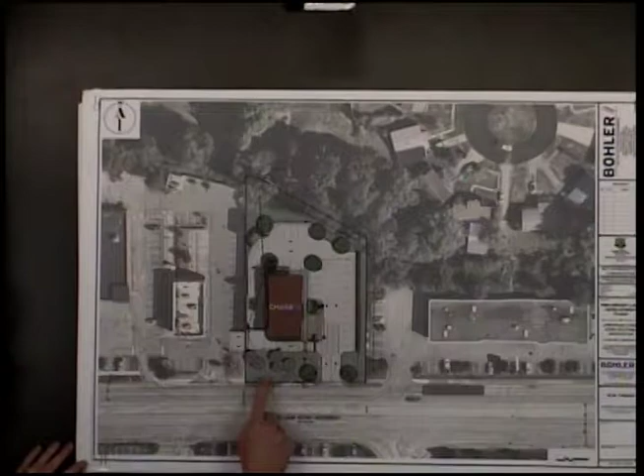As you can see on our site plan, there's an existing driveway here, and another existing driveway on the western side of the property. Chase is proposing to close that off and have only one entrance onto their site.

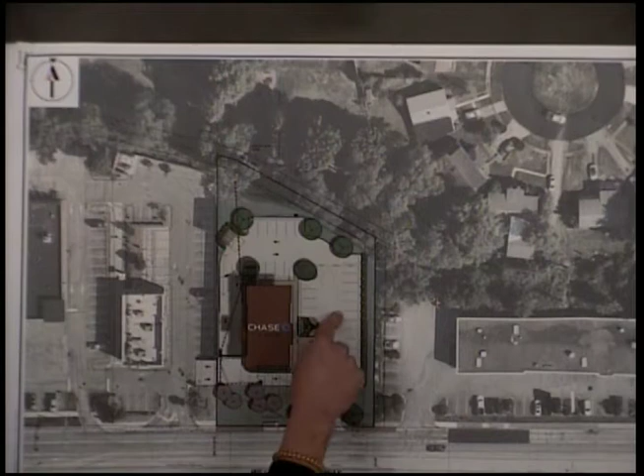They are proposing counterclockwise circulation around the site, and you can either exit back onto William Penn or use the cross-access proposed with Panda Express. That will require a PennDOT permit, so we are planning to apply for that soon.

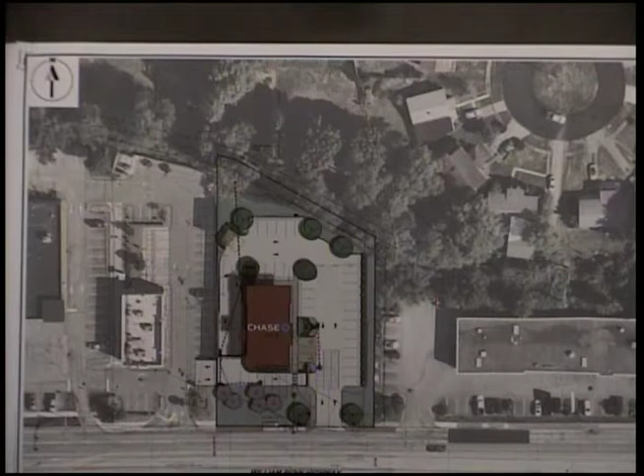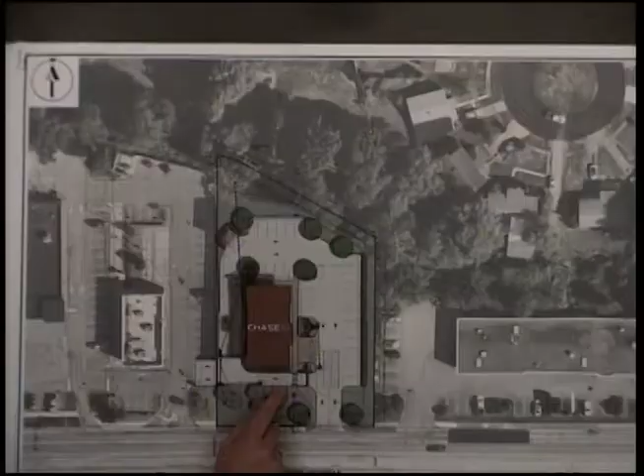With respect to stormwater management, there are currently no on-site stormwater management features, so Chase is proposing to install a rather large underground system in the front yard to reduce runoff rates and volume.

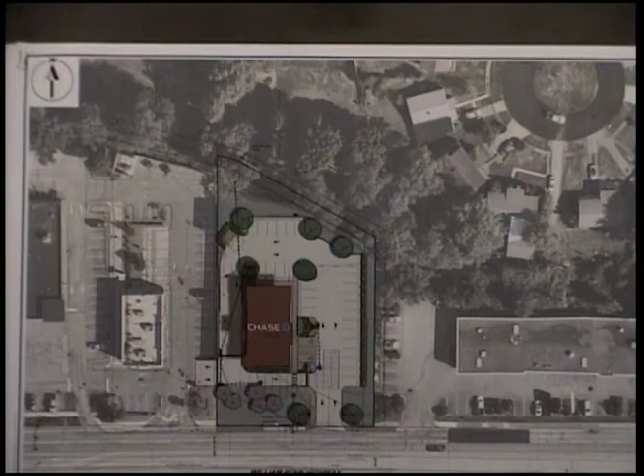The site also achieves a reduction in impervious area — a 13% reduction in impervious surface from the existing state. And then I can show you...

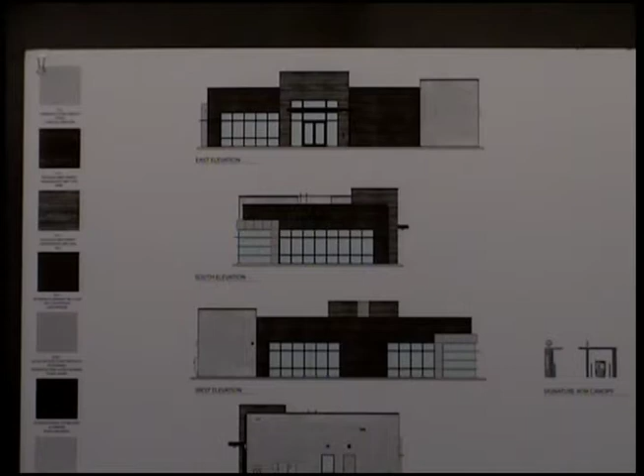These are the building renderings. It's made up of — I'm not an architect, so I don't remember the exact materials — but it's a mix of wood-look fiber cement boards and cream-colored stone finishes. That's what I have to present, and I'd be happy to answer any questions.

Does your stormwater drainage meet the MS4 requirements that the borough now has? Yeah, we will be asking for two design waivers.

The ordinance requires a minimum of 48-inch diameter pipes, and due to how the site is laid out, it's not feasible for us to tie into the existing infrastructure within William Penn Highway.

So we need to use something smaller in depth, which is why we're using StormTech chambers instead of pipes. We ran into this with the Sheetz project that was recently approved too.

The problem is the storm system on Route 22 is very shallow — only about 6 feet deep. So by the time they excavate down and get the required cover over their pipes, they end up lower than the system they have to tie into. In order to raise their system up, they have to use a smaller system. So we're aware of that.

Okay. Does anyone in the audience have any issues with this? Not seeing any. Board members, any questions?

The entrance and exit onto 22 — is there a light at any of those? No, the light's further down. I'm trying to remember... no, there's no light there; the light is down further.

There's one before, up at NTB, and then there's one at Chick-fil-A. I think you can kind of see the shadow here of the one signal arm, and then there's another one down here.

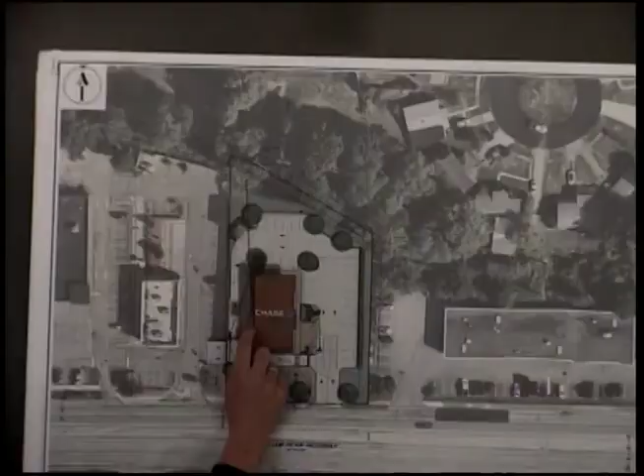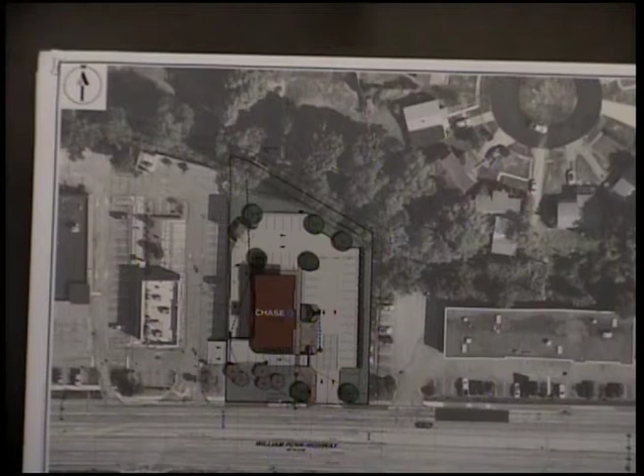So if we can't get this, people will just have to come out this way. There's also enough room back here that if you park in this area, you can back out and come straight out this way. There's also a bypass lane on the other side, on the outside of the drive-through, correct? Yes. That'll work, I guess, either way.

Any further questions from board members? I'll entertain a motion for 21-1-ST. Make a motion to approve? Second. All in favor? Aye. Aye. We're good. Thank you.

Thank you, you guys are easy. Well, we looked everything over and it met all the requirements, so. It's nice, an improvement to what we have. We still have to go through council yet. I know, they're not as easy. We just make a suggestion to them, so. I know, thank you so much. You're welcome, sure.

All right, second item, 21-2-ST, Gateway School District. Applicant is requesting site plan approval to renovate the existing middle school, add several additions, and includes installation of an underground stormwater management control system. The property is 26.05 acres, located at 4450 Old William Penn Highway, tax parcel 855N105, in the R1 One Family Residential Zoning District.

Please sign in and state your names for the record, please. Hi, my name is Hank Kochik, I'm the architect for Gateway School District for the project. And I am Bob Brown, I am Facility Director for Gateway School District. Thank you, sir.

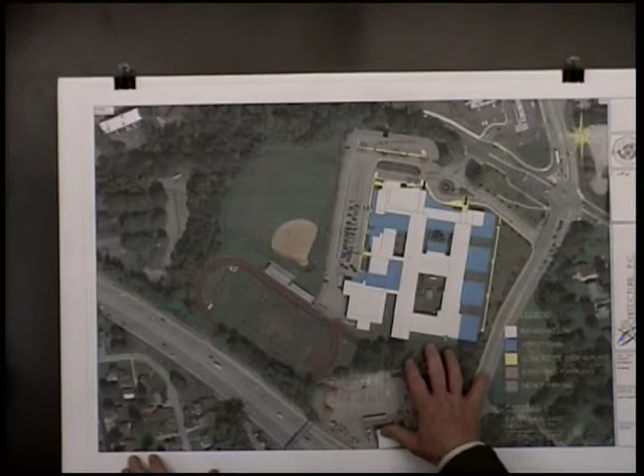Please present your case. We'll start with the color rendered site plan, and if questions get detailed, I brought design site plans that might show more detail. I also have a rendering of the facade of the building. This is the existing Gateway Middle School. Everything in gray is the existing building. Everything in blue is where we're planning additions. The existing paving is this lighter gray color that we're repaving, but that's all existing. This darker gray is where we're proposing additional parking. The yellow represents existing concrete sidewalks we're replacing, or new sidewalks we're adding.

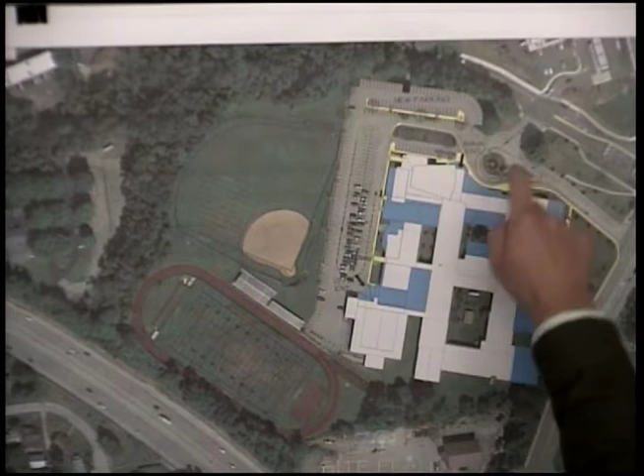We're not changing the traffic patterns on the site. The entrance and exits are remaining where they are. We are required to put a small to medium-sized retaining wall about in this area to help hold the dirt back for this addition. These four additions are classroom wing additions. We have an art and music addition over here, and a gym athletic addition in this area. These pieces here are classrooms and a multimedia center addition, and in the front is the administration. The main entrance used to be right here; we're moving it to the auditorium entrance, so the main entrance will flank the auditorium and the administration area. That's the site plan.

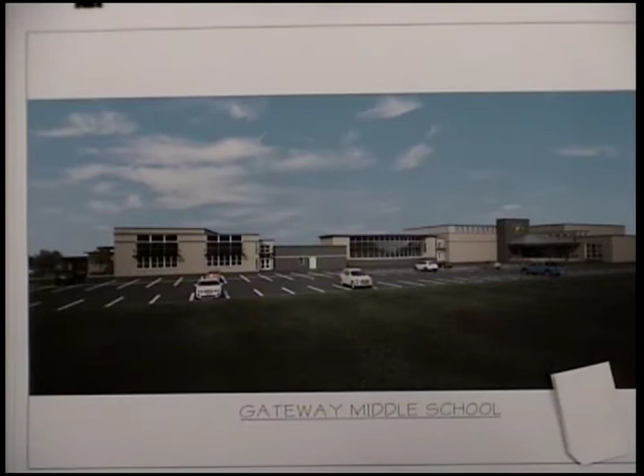I thought the best elevation to bring would be the one that is the parking lot between the building and the baseball fields, because that's where most of the people will park, and that's a lot of what will be seen. So that's what this elevation is.

We create an athletic entrance down here between the new gym we're adding and the existing gym. This is a cafeteria addition with an entrance there. This is the fine arts wing where we extend the band room and the music room, and we have an entrance for them in that area.

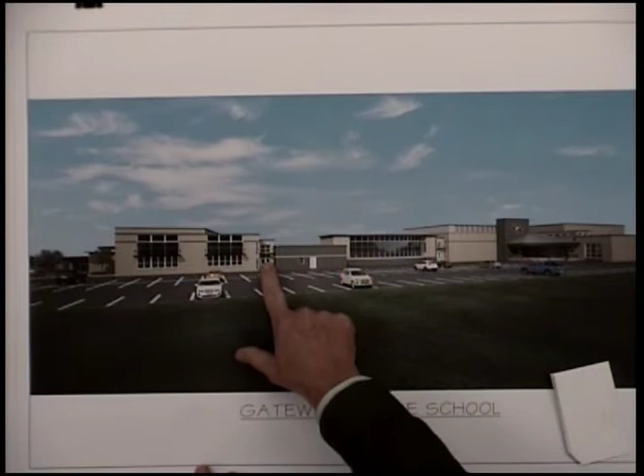That's the 10-cent tour. I'm sure there are questions.

You're adding a certain amount of students. What are you doing for the kitchen facilities, grease traps, and that kind of thing?

We're completely redoing the kitchen. Where it exists now is being taken over as additional space in the cafeteria. And we're putting a new kitchen in with a new grease trap, new equipment, and a new Ansul system.

Thank you. The entire building will be sprinkled when we're finished with it. Right now it is not. There are also a lot of technology upgrades.

The building is over the square footage for the code allowance for buildings, and it was before we even started. But we are dividing the building in half with a code-compliant fire separation wall, so we're bringing a non-compliant piece into compliance with that as well through the renovation.

Where is that wall? If we go back to the site plan, it's probably easiest to show it there. We bring this wall where these three pieces of the building hit this building, that's where we make the separation. So there's a wall there, there's a wall there, and there's a wall here.

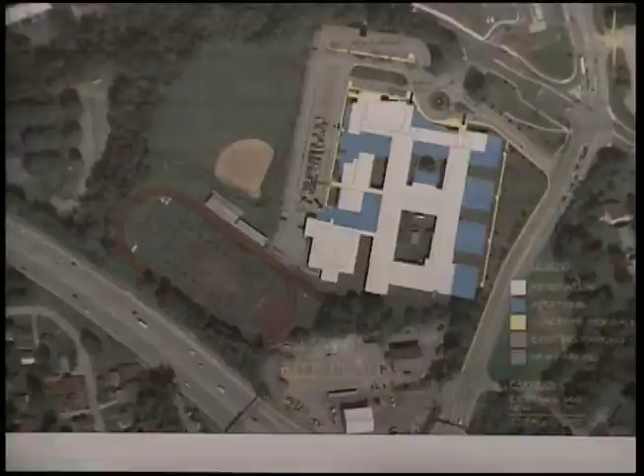What's the rating on that? Is it a 3-hour wall? It's a 2-hour wall, made so it has a wall on each side of it. So the way the code reads, that 2-hour separation works. If one half of the building were to catch fire, burn, and fall to the ground, the other half has to stay standing, and that's the way this wall is built.

How many classrooms will there be in total? Do you know the total number? I could count, but it's probably around 60, give or take. Actually 60 seems a little high, maybe 55 classrooms.

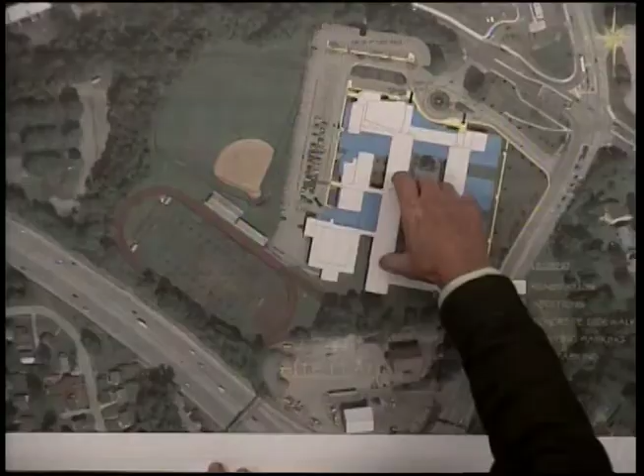And that's up from what now? It's not up a whole lot, because we're making a lot of the classrooms larger than they were. Right now there's probably 45 classrooms and we're going to 55. We're adding classroom wings, but when we renovate the existing building, a lot of times 2 classrooms become 3, or 3 classrooms become 2, and things along those lines.

Is this functional now? Are there students there now, and will they be able to stay while you're doing this, or will they have to go somewhere else? We're going to do this entire project unoccupied. We're going to move the students out of this building and renovate it, a process of about 2 years, and then once it's complete, we move everybody back in.

Where do they go? They're going over to the other main campus with Moss Side Middle School. Is there enough room for them now? Currently it's the 5-6 building, and with some modulars and some interior, minor movements, we're able to fit them all.

In view of the decreasing number of students, can we do without this building completely? To fit them all, we have trouble — there's trouble fitting them all at the other building, and there's temporary classrooms that have to be built, and spaces taken over that aren't classrooms.

So no, there isn't a building on campus that will house everybody. At the end of the day, we will have one building that houses everybody instead of two buildings housing most of the people, from 5th to 8th grade. Yes.

So modulars are going to be going up over at the Moss Side main campus. Okay.

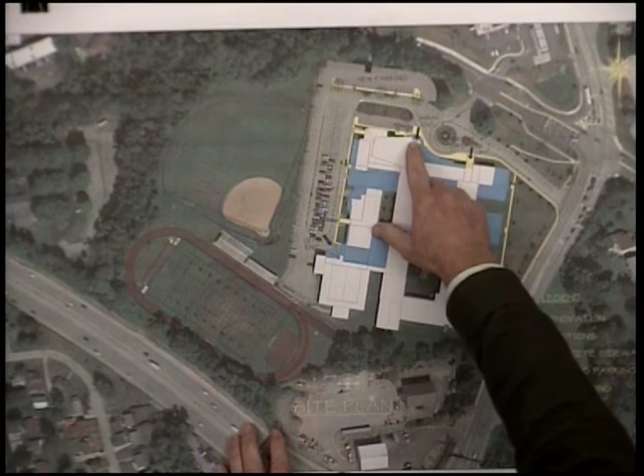If they do have to go into the building, before they enter they go directly into the administration area and get face-to-face contact with somebody, then exit a different door to go back into the building. So there are multiple levels of security for visitors entering the building.

For students entering the building, we have it set up so that the buses will come, loop around here, and drop off in this area. They will come in through the gym and go through a security check in this new gymnasium. Then they can cross the gym and go to breakfast in the cafeteria, or go to their classes or homerooms.

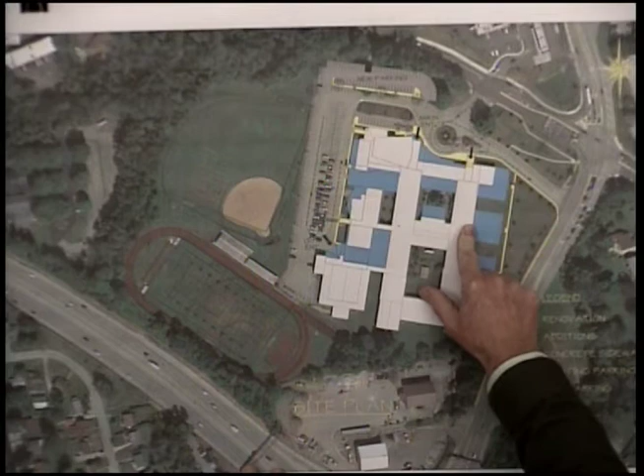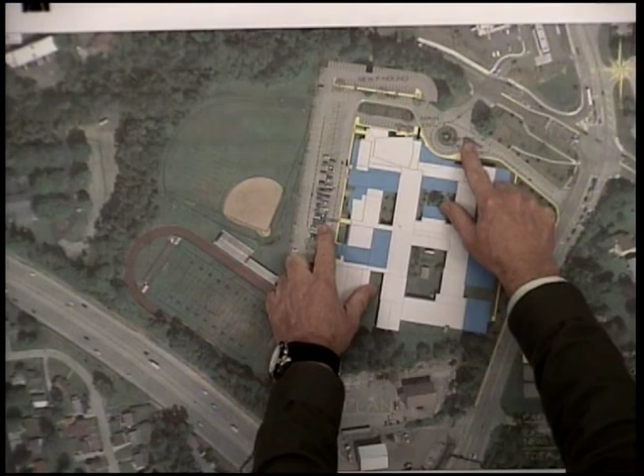The students that come from parent drop-off are now going to happen over here at this parent drop-off. So we've been able to separate bus vehicular traffic from car vehicular traffic, which is a safety factor that the Department of Ed highly recommends. Now we have that completely separate, with a smaller system set up like the one for students dropped off by parents.

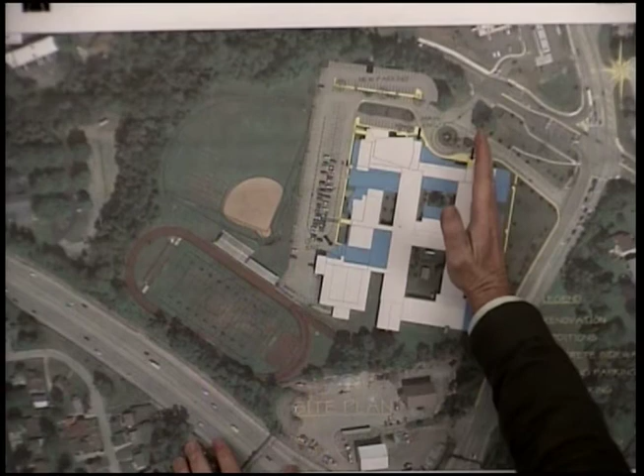Is there enough room for the buses to turn around? Yes, they currently can turn there.

Any other questions from board members? Not seeing any, I'll entertain a motion to accept. I make a motion to accept. I'll second it. All in favor? Aye. Passed unanimously. All right, thank you.